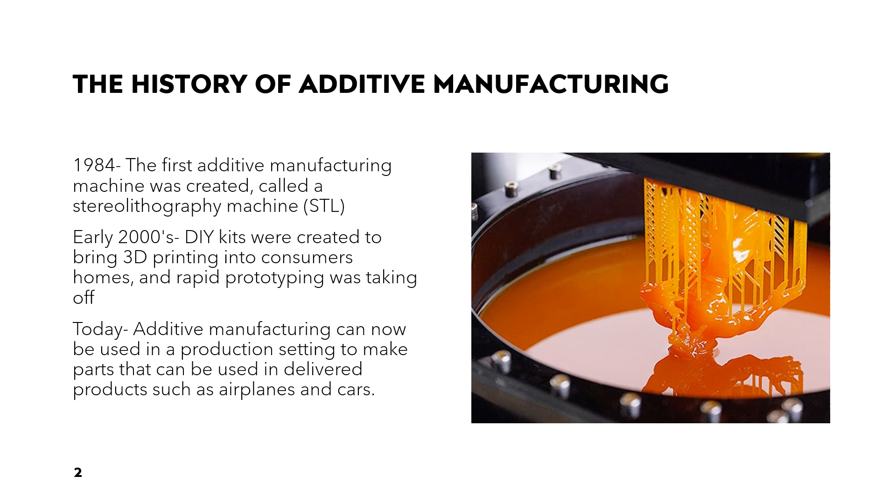The challenge in this new manufacturing process, where material is built up into three-dimensional parts, is the quality and consistency of the finished product. This makes adaptive controls critical to the varying additive processes. Different batches of material can have inconsistencies in their composition, creating variation in the quality of the final product. Inconsistent temperature can create warping, stress fractures, and porosity.

Layer by layer fabrication must be consistent and aligned to ensure that the structure will be strong and not fracture. Another challenge that additive manufacturing has always dealt with is the ability to control the layering in a way that provides a smooth surface finish. By advancing adaptive controls, the industry can mitigate these challenges and increase the quality, consistency, and productivity for the manufacturer.

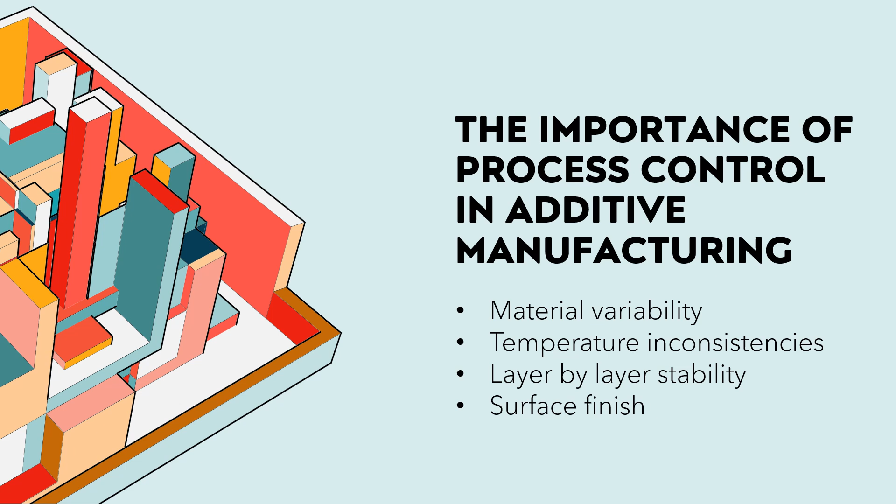The Encyclopedia of Physical Science and Technology states that an adaptive control system is one in which the controller parameters are adjusted automatically to compensate for changing process conditions. In order to implement adaptive controls, there is a need to understand what the key process input variables are and what their optimized state is. Then, a system of controls that automatically adjust the KPIs can be implemented into the process using sensors, machine learning,

and even artificial intelligence. The intent of this presentation is to explore new advancements that are being made in adaptive controls for manufacturing, to understand the current state of those controls, and to look to the future for how controls can take additive manufacturing to the next level in Industry 4.0.

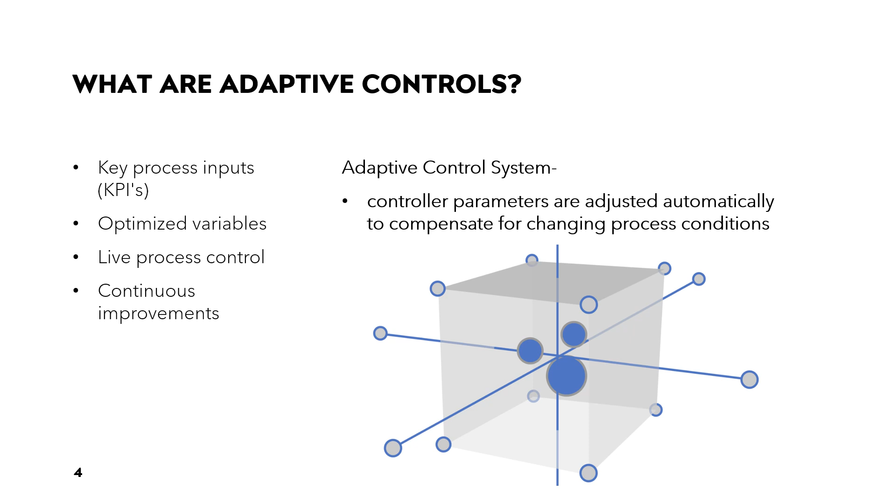One of the ways that adaptive controls has been implemented into additive manufacturing processes is via in situ monitoring controls. In situ process monitoring means that the control monitoring and adjusting is done directly where manufacturing occurs. This optimized form of controls is done using optical-based monitoring, acoustic-based sensing, laser light scanning, and X-ray monitoring.

Laser additive manufacturing processes such as laser powder bed fusion, or LPBF, and laser directed energy deposition, LDED, can be complex and defects can be difficult to mitigate. In LPBF, it is a challenge to achieve a fully dense part with zero porosity due to the stochastic nature of the process. It is also limited to small parts due to its limited build volume in the build chamber and low build efficiency. The process is also extremely sensitive to powder characteristics and control parameters. Also, the high thermal gradient stemming from rapid heating and cooling can induce stress and distortion in the material.

LDED uses a higher voltage and therefore is capable of creating larger parts from 3D models. It is also capable of adding material to existing parts, making it a workable solution for repairs. That said, LDED has its limitations as well. The high thermal input and large melting pool creates a coarse microstructure, reducing the mechanical strength of the material.

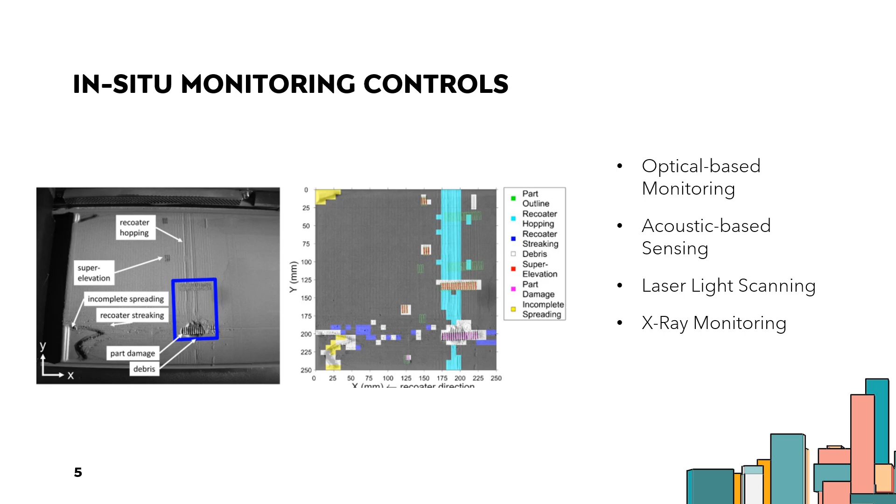A digital twin is a virtual representation of a physical product that encompasses the manufacturing process of the product, the dynamics and behavior of the physical product, as well as the product itself. This digital twin, or DT tool, was developed to allow a manufacturer to use tools such as the Internet of Things to fully optimize and track the manufacturing process of a product and how it responds to constantly optimized controls.

More specifically, DT was developed by NASA to track and analyze the performance of a satellite by using the digital twin version of the satellite while the physical satellite was in flight. The development of a DT consists of 5 steps. The first step is data collection. During the data collection phase, the data is acquired from various sources including sensors, monitoring systems, and simulation tools. This dataset consists of process parameters, material properties, environmental conditions, and machine performance.

Using this data, the next step is model development, where the data from all variables will be used to develop a mathematical model and optimize metrics. The calibration and simulation phase are critical to ensure the model provides a consistent and accurate product output. In additive manufacturing, it is critical in this phase to test the strength and integrity of the material since it is formed by bonding layers of material together to make geometry.

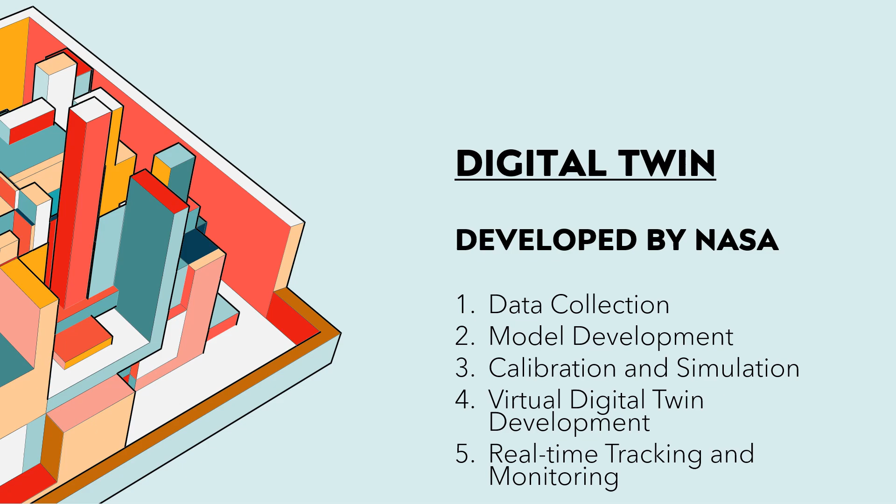The additive manufacturing industry is growing at an extreme rate. As innovative technologies develop, what was recently new tech becomes outdated and it can feel difficult to keep up. Integrating new adaptive controls into existing additive manufacturing systems can pose a challenge. Many legacy additive machines were not originally made with adaptive controls in mind, making them difficult to retrofit. These control algorithms can also only be effective if they can handle unique environments, differences in machines, and the multitude of varied materials that the machine is capable of printing.

Another challenge is the ability to compute and process high data volume. The system will require robust data processing for substantial amounts of data and be able to handle complicated algorithms. The storage space is also significant, as the system will also need to be able to store large data sets without slowing down the real-time adjustments that are being made to the process. Implementing AI into a production environment will require major advancements in computing power and storage needed to fully integrate and automate adaptive control systems.

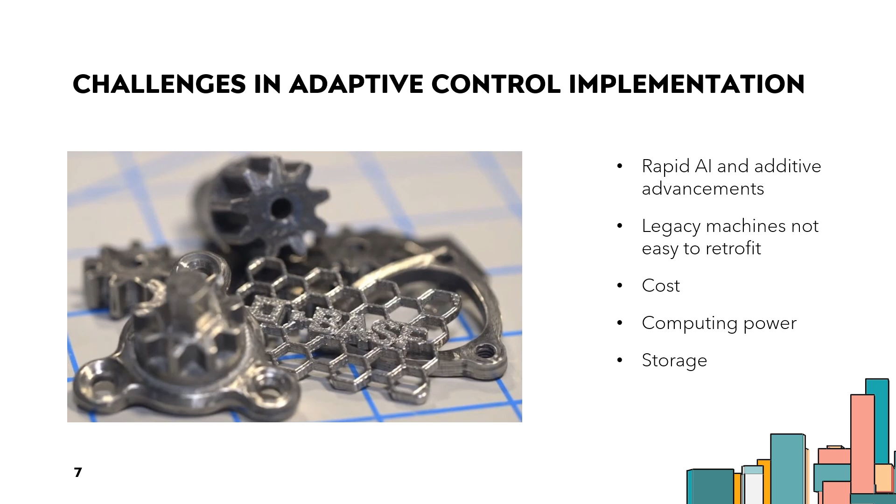In conclusion, the current state of adaptive controls has played a large part in the rapid progression of a young technology in additive manufacturing. The industry is turning from what was once a fun hobby or a tool for rapid prototyping into a production manufacturing tool with capabilities unrealized prior to its time. In situ controls like optical monitoring, acoustic monitoring, and laser light scanning have been implemented in laser additive manufacturing machines to analyze and identify internal defects in real time while parts are being manufactured.

Tools like digital twins have been able to take the in situ tools to use IoT, AI, and machine learning to take this data and drive continuous improvement in 3D printing. The biggest limitation as we move into Industry 4.0 is the necessity for computing and the current cost of AI technology. As new breakthroughs are made in the technological world, these limitations will dissipate and we will begin to integrate rapidly and efficiently into the additive manufacturing industry.